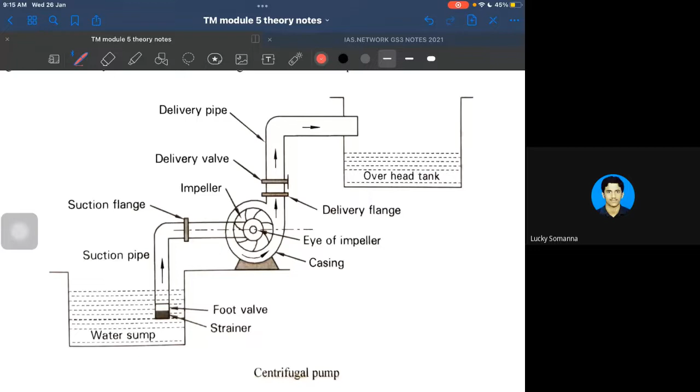What does a turbine do? It takes the fluid from the higher head, and because of that energy deficit, it is exactly the reverse of a turbine. A turbine takes the fluid from a higher head and transfers it to a lower head. Whatever energy deficit is there gets transferred as energy output. Now, in a pump, you are giving energy to the system to transfer fluid from a lower head to a higher head. So pump and turbine are exactly opposite to each other.

So you have to remember this. Precisely, a pump is exactly the reverse of the Francis turbine. If you observe the Francis turbine, even the pump will be the same as the Francis turbine. But in a turbine, you send water from a higher region so the impeller rotates, and this impeller is connected to a generator. Here, it is exactly reverse.

So the different parts of a centrifugal pump we can see. The main part is the suction pipe. Next would be the delivery pipe, and this is the water sump strainer.

What is a strainer? It is a small filter that helps prevent dirt from getting into the suction pipe. That is known as a strainer.

What is a footvalve? How many of you know what a footvalve is? Most of you have seen it in centrifugal pumps at your homes. It has a triangular cone shape. It is used for priming purposes, to remove air from the suction.

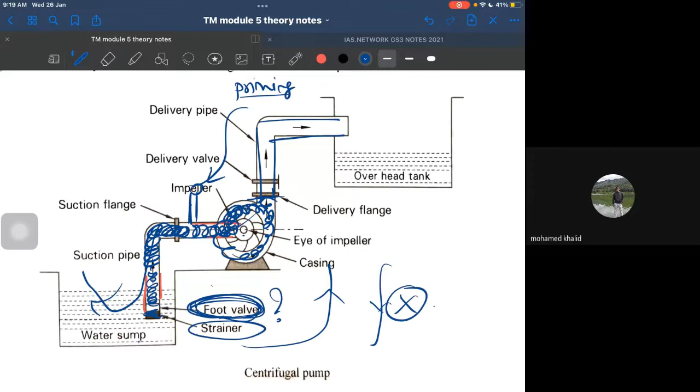Yes sir. Okay, so that is a very important thing. So the impeller induces a centrifugal force.

Now I'll try to trace the water molecule, how it emerges out from a centrifugal pump. Kindly observe: this is the water molecule. It would go like this, pass the strainer and the footvalve through the suction pipe. Kindly observe now.

First it will be at the eye of the impeller, which is the center of the impeller. From the center of the impeller, it would be thrown outside because of centrifugal action, from inlet to outlet. Centrifugal force always acts from the center outward to the radius. So therefore, water would be thrown out because of centrifugal action, then it would be sent up because of energy. Understood? So that is how the movement of the water molecule takes place.

Now, concerning this, you again have a lot of efficiencies and a lot of heads as well. There was a head in case of turbines - Pelton, Francis and Kaplan. Here also you'll be having many amounts of heads. Let us discuss the different amounts of heads you have in case of a centrifugal pump.

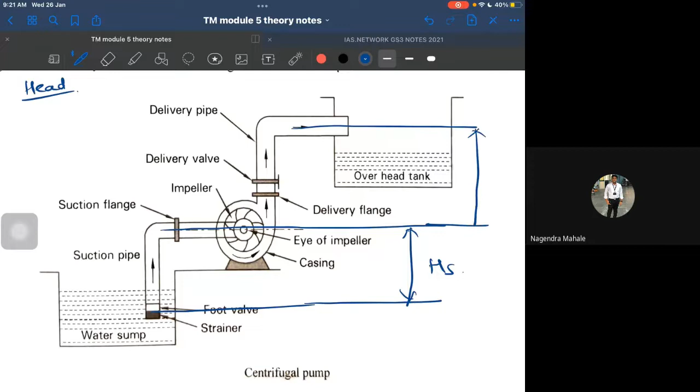From the eye of the impeller, the center of the impeller, to the foot valve - that is known as the suction head. Understood? From the eye of the impeller to the delivery, that is known as the delivery head, HD.

Now, because this is a pipe - I will tell you, see this beautiful concept now - because this is a suction pipe, as the water molecule enters the suction pipe, whether there would be friction losses?

Yes, because it is traveling within the pipe, there would be friction losses HF, which you calculate using the equation 4FLV square divided by 2GD. Am I right? There will be friction losses since it is traveling in the pipe, no? Correct?

Yes sir. Okay, so that particular friction loss, I would call friction losses in the suction pipe. So this particular head is known as friction suction head. And similarly, because the delivery pipe is also a pipe, you will have losses due to friction in the delivery pipe as well. So this is the head loss due to friction in delivery pipe, and this is head loss due to friction in suction pipe. Understood?

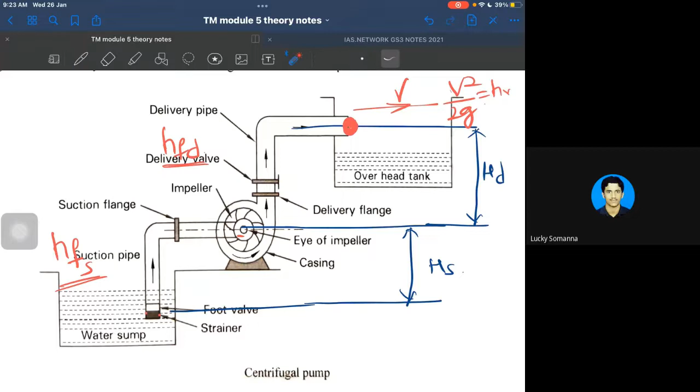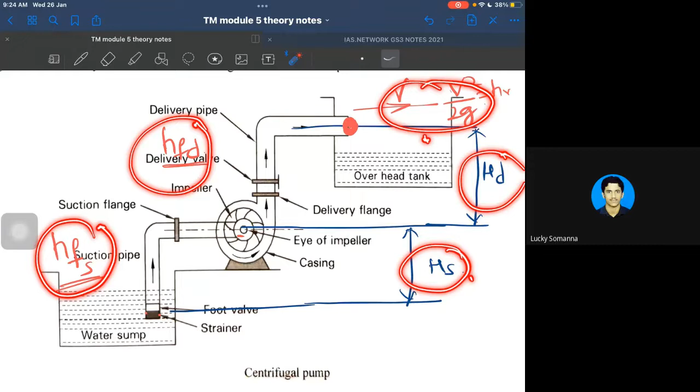So if I have to design a pump, I have to design it so that it takes care of suction head, delivery head, head loss due to friction at suction pipe, head loss due to friction at delivery pipe, and the velocity head at the outlet. So it has to take care of all these 5 components, and the total head, that is the summation of all these 5 components, is known as the manometric head.

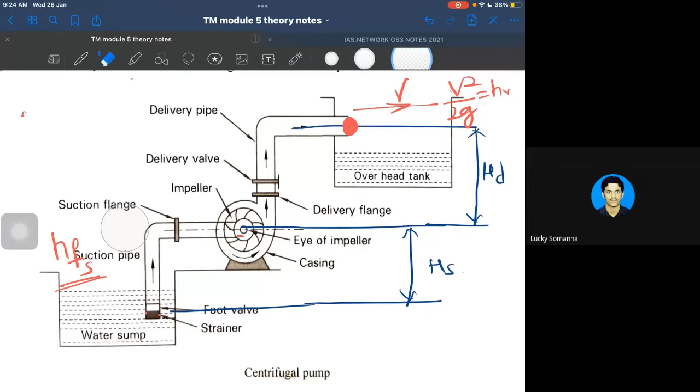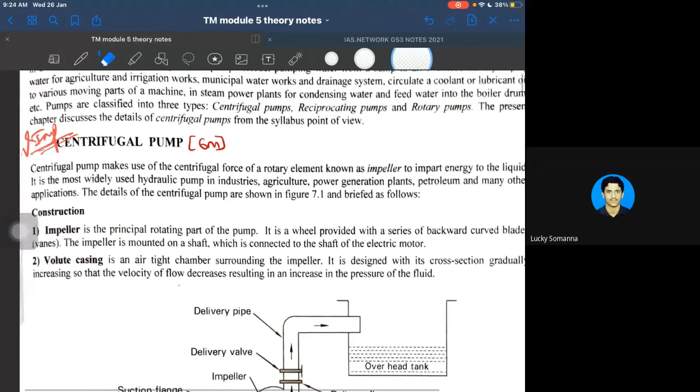So basically, manometric head is the head through which your pump would work. Again, this forms an important question where different types of heads are being asked. Clear? Any doubts here? No sir. Okay, so this is for reference, I have written it in the reading.

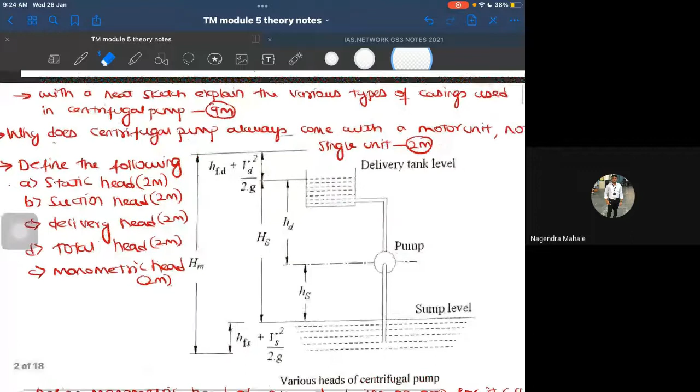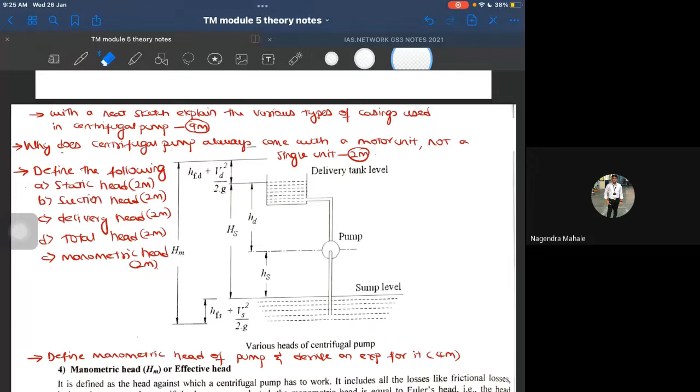Let it be as such. Do not get confused. These are the typical examples, typical questions that were asked. You can observe the manometric head, which are stated here.

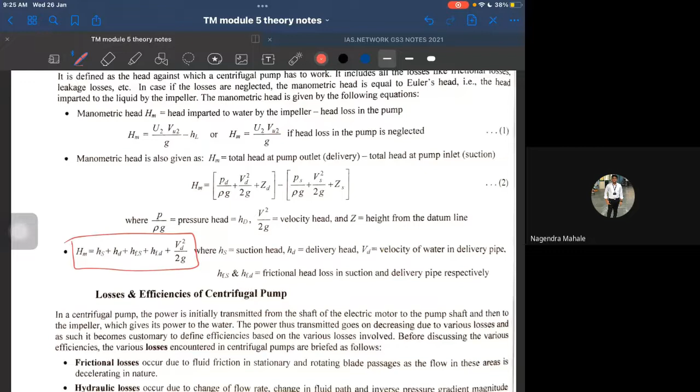It is given as the suction head plus delivery head plus head loss due to friction at suction head, head loss due to friction at the delivery head, and even the final velocity head at the delivery pipe. Okay, so you can observe the things. So this is very, very important. Different types of heads is very, very important.

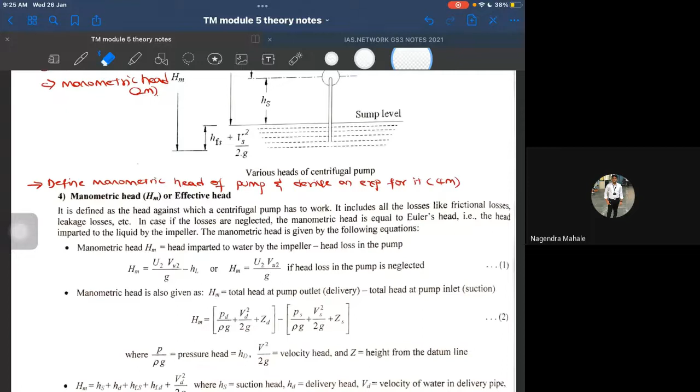Next is the efficiencies. So again, manometric efficiency or hydraulic efficiency - manometric efficiency is nothing but the hydraulic efficiency. It is the ratio of manometric head divided by head imparted by the impeller to the water. So head imparted by the impeller is U2 VU2, against the manometric head. The ratio of these two is the manometric or hydraulic efficiency.

Second one is mechanical efficiency. This is simple to understand. Mechanical efficiency is power generated by the impeller divided by power given at the pump shaft - so I can say it as power input or the shaft power. So this is the mechanical efficiency.

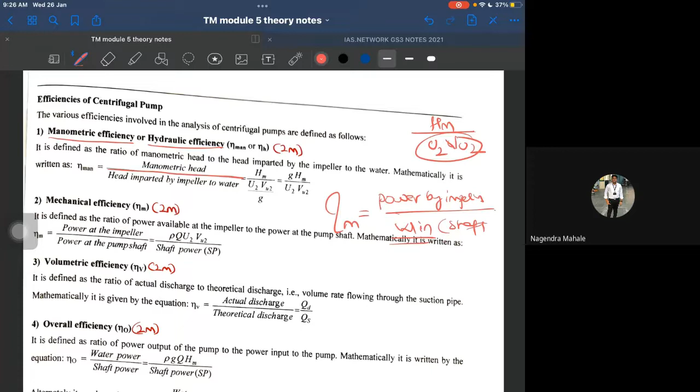Volumetric efficiency, you already know as actual discharge divided by theoretical discharge. What is the actual content of water which is coming out? And according to theoretical aspects, according to your calculations, what was the amount of water expected, and how much actually has resulted? That difference is known as the volumetric efficiency.

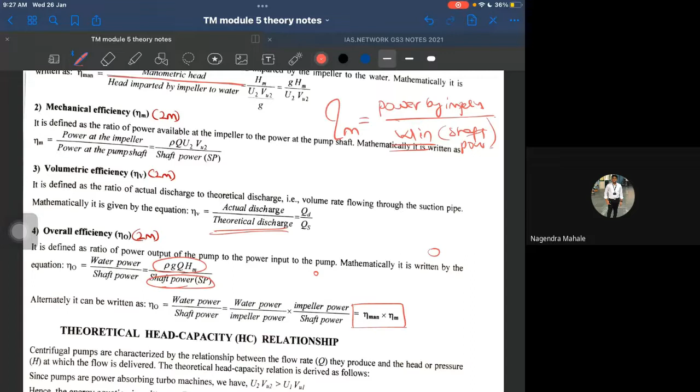Overall efficiency, if I say, is total output by total input. Input you are giving as shaft power, output you are getting as manometric head. So the ratio of manometric head divided by the shaft power is known as overall efficiency. Remember, overall efficiency will always be the product of manometric efficiency and mechanical efficiency. So all these concepts are again important for your examination. I would mark this as important.

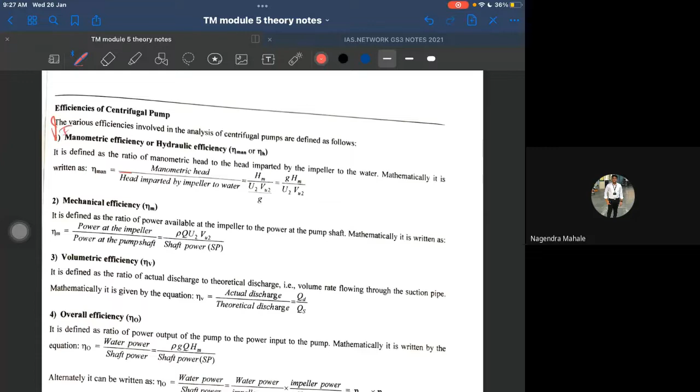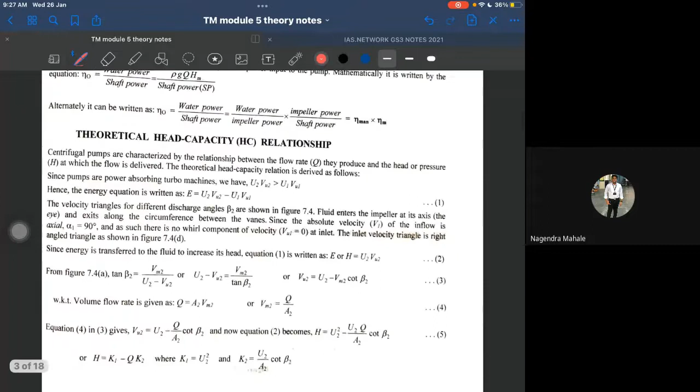Overall efficiency I'm talking about. So the last concept we are trying to deal with in case of pumps is regarding slip and cavitation. This forms an again important aspect. So what do you mean by slip? Anyone would know? Anyone knows about this? What do you mean by slip?

What do you mean by slip?

There is something known as Euler head. Euler head is the actual or theoretical head that you expect at the outlet of the pump. But because of various reasons, like leakages in a centrifugal pump, vacuum created in the suction pipe, cavitation, and inefficient mechanical transformation, whatever head you actually get at the outlet will not equal the Euler's head. Euler's head is the highest head you could get at the outlet of a pump, so you will never actually achieve it; you get a slightly smaller head because of these losses.

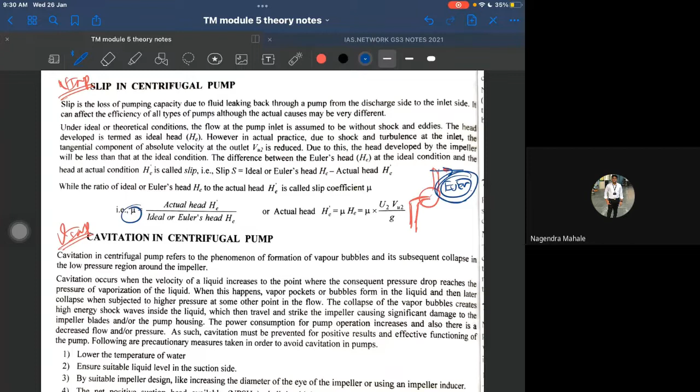Now coming to cavitation. To understand cavitation, consider the centrifugal pump and the suction pipe. Since the suction pipe is under suction, it is under vacuum, so the pressure here is lesser than atmospheric pressure. That is why water gets inside the suction pipe.

Now there is something known as the vapor pressure of water. If the pressure at the suction pipe is lesser than the vapor pressure, the water automatically transforms into vapor.

The problem is that the air bubbles formed within the suction pipe will hit the blades of the pump. When they hit the blades, they damage and create a cavity on the blades. This problem of creating a cavity on the blades of a pump because of air bubbles formed in the suction pipe, when the pressure drops below the vapor pressure, is known as cavitation.

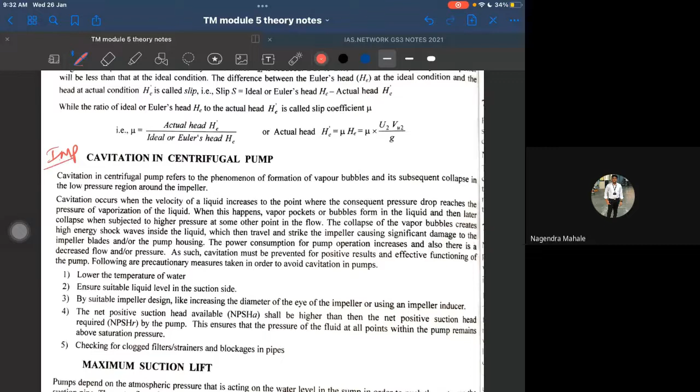Sir, can we write it in our own notes, like you explained? We can write it in our own notes, no sir?

You can write it, but it has to convey the same content. That is all that is required.

So what are the precautionary measures you can take to avoid cavitation? First, lower the temperature of the water. Do not pump high temperature water; always go with low temperature water so that cavitation does not occur.

Ensure a suitable liquid level in the suction side. If there is no liquid, cavitation and air bubbles may occur inside the suction pipe. So always ensure there is a good amount of liquid available in the suction pipe.

Also ensure suitable impeller design. Even if air bubbles are formed, you have to design an impeller so that they squeeze out of the blade without creating a cavity on the impeller. So suitable impeller design could also help.

And the net positive suction head available should always be higher than the net positive suction head required. That is something you have to take care of.